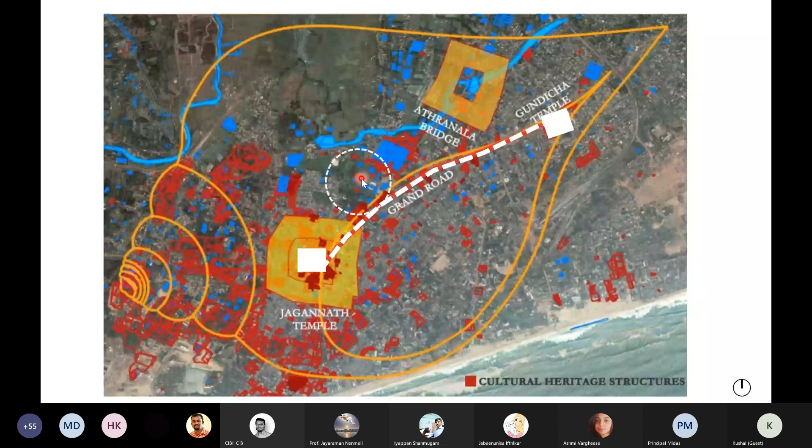But to develop this, we had to go through several sacred scriptures, how these have been described, and we tried to give references from the Skanda Purana, which was written around the 8th century.

There are several chapters in the second phase of the Skanda Purana. I have 49 chapters on the Puri Odisha region. It talks about how the Jagannath cult started and how people started embracing Jagannath as the supreme lord and king, and how the surrounding region got associated with the cult of Jagannath.

Along with the Skanda Purana, we also followed the Gita Govindam by Jayadev. He was a great poet of Sanskrit, and he wrote this epic poem, Gita Govinda, on the life of Krishna and Radha in the 12th century AD.

Jayadev was himself from Puri, so he completely described in his poem what trees have been planted, how people are sitting, how people are enjoying the landscape. So we had to take both of these into our study, and then we came to a conclusion.

This was brought to us by the king of Puri and everything. So we have a cultural advisory committee who advised us on these things.

If you are aware of how the Jagannath temple evolved in the Shankha Kshetra, it was on the Neel Parvat, which is a blue mountain, on which there is a banyan tree, or the Akshay Vat, called here a life-giving tree, and under that tree was a blue rock. That was the whole concept of the development of the Shankha Kshetra of Puri.

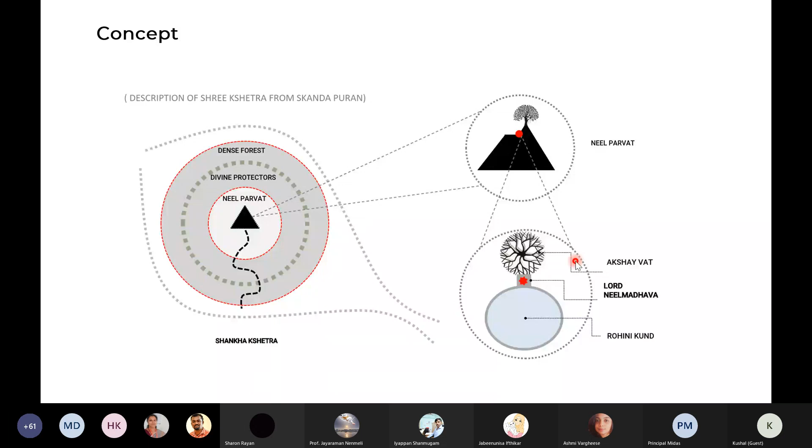And in the Gita Govinda by Jayadev you have water bodies, people moving in boats, creepers coming in, and people dancing around, enjoying time in the pleasure garden. This is a famous art form here in Odisha called the Pattachitras.

We also took inspiration from the Vrikshayurveda written by Surapala in the 10th century. Here he describes the pleasure garden. So I'll give you some time to read what a pleasure garden described by Surapala is. You can go through it, and I'll also read aloud.

Garden houses should be protected from the sun by thick foliage of Atimukta creepers. You have creepers over garden houses with honeybees hovering around them and flowers strewn over. Whenever the breeze comes from the sea, the trees sway with flowers, and you have a feeling of pleasure in that.

At places, beautiful ponds adorned with swans are to be made, with trees planted on the borders of these ponds, so that when the flowers fall, they fall on the waters and float on the water body, like eyes in the form of flowers.

Then there are long water bodies, free from aquatic life, where you have the pleasure of boating, with flowering trees all around and lotus sprouting somewhere, including blue lotuses that look like maidens' black pupils.

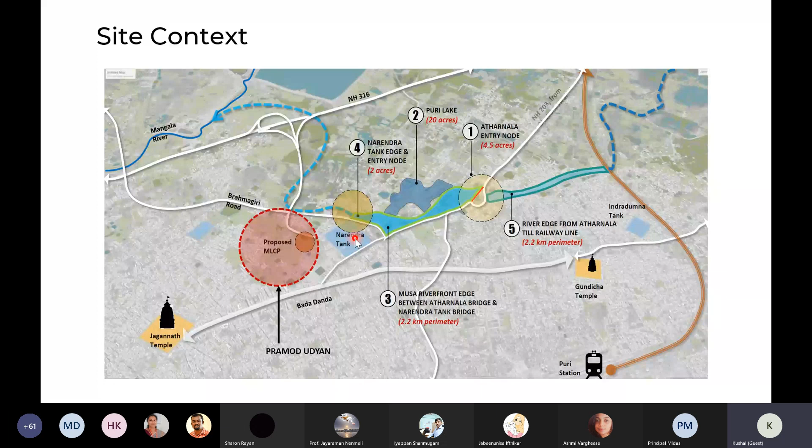So what we decided to do was, at location B there is an important mutt. Mutts are a sacred stay of saints who live here and have given their life to the Jagannath temple. They have made a whole sanctuary out of it with their own importance tied to the temple. This mutt is closely related to the land, and we wanted to create a connection between the tank, this Pokhari, the Narendra tank, and the site.

This is the entrance, the only entrance point to our pleasure garden. D is the Bento Pokhari, the hunting ground and hunting tank. And C is a small temple of Sugriva, where you have martial art forms being practiced.

So all these somehow relate to us as sacred. You have yearly functions of Jagannath happening over here, in these areas.

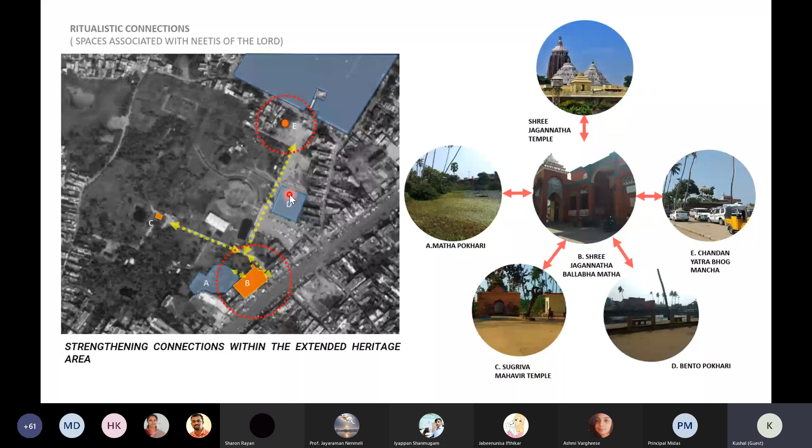So what we developed and proposed was the yellow part is the proposed pilgrim center, which is the MLCP, and the green area is the whole Neelachal Parvat, the mountain which we want to create here.

This is to be demolished because it has no historic significance and it's completely out of context. So you have several water bodies in the site which we have kept and want to develop, and conserving of the temples, revival of the mathas, and the area has to be developed through enclosed buildings.

We want to develop the grand entrance to these, and then you have a vehicular access to the pilgrim center from behind as well as from the front, and then you have a connection with the Narendra tank.

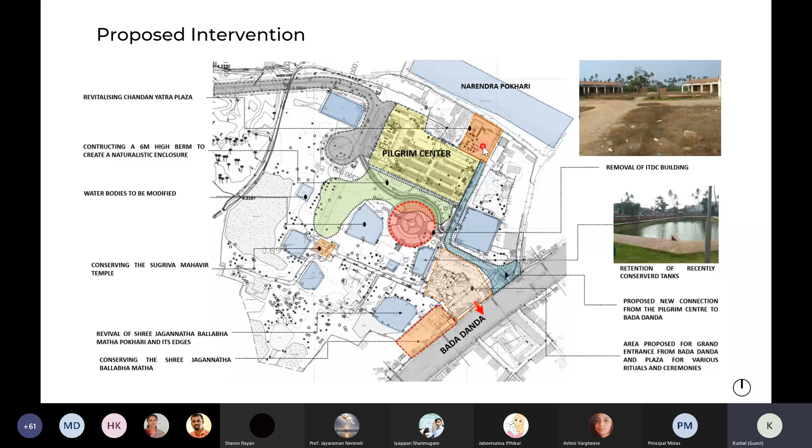So this is the grand road. This is 25 meters wide. This is the matha which I was talking about.

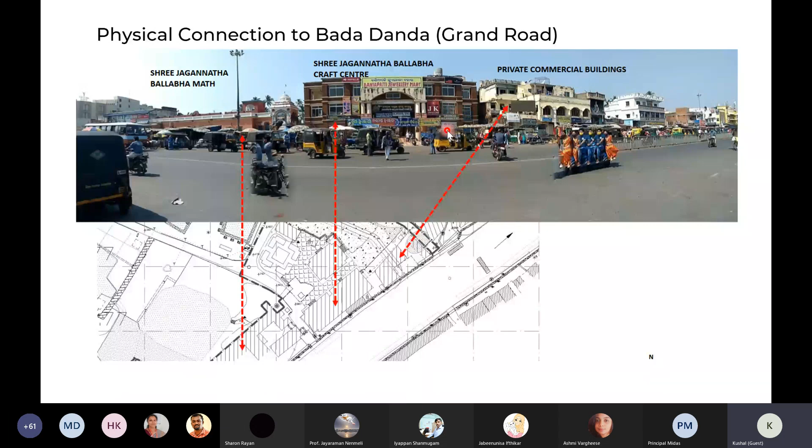And these two buildings have little significance in the region, so we want to take these over and give a grand entrance to our park, which has been designed by a famous sculptor who is no longer with us due to COVID, and he's a Padma Vibhushan. He designed this gate, so we want to preserve this as well.

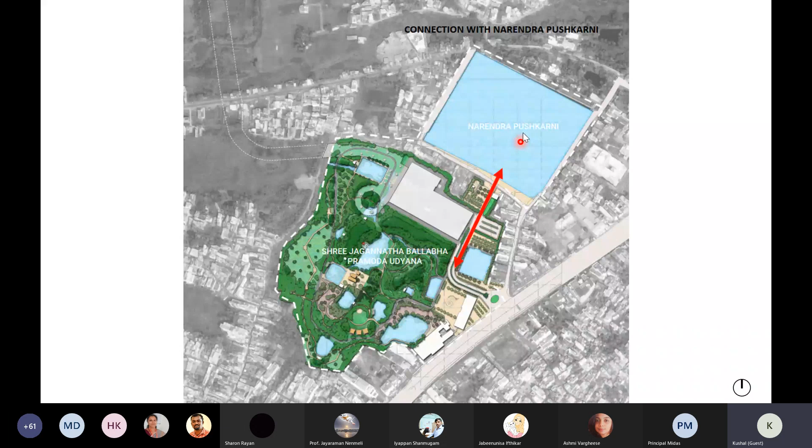And this was our proposal - a new approach connecting the Narendra Pushkarni with our Grand Road, and you have vehicular access on this road only. And this is the grand entrance which we are talking about as an amenity center.

We have cloakrooms, toilet facilities, restrooms for people. After they have walked 400 meters from the temple and approached here, they can sit here and relax, and then go into this nice landscape area.

So we did a hydrological study to understand how the flow of water takes place, because this, if you remember the site, is all marshland. So all the water has a tendency to flow from the south towards the northwest.

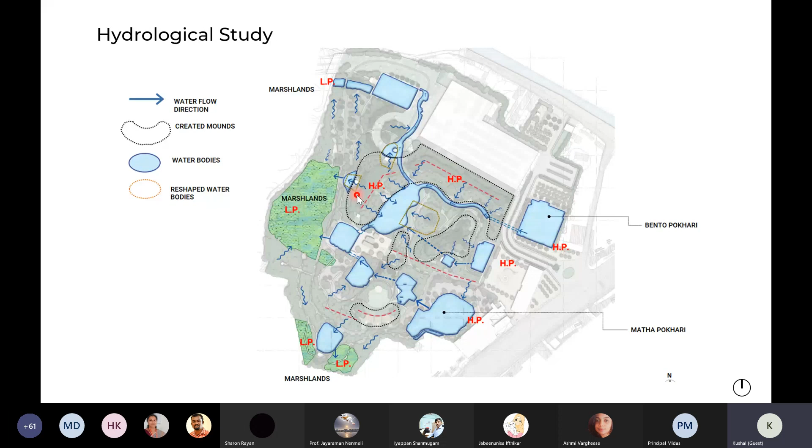So we have tried to develop water rivulets and channels, and these form the high points. We would like to dig these up, and the same soil can be used to make the mounds here, and then develop the landscape all around, which I will talk about again.

So we have zoned it. This is the place for the Chandan Yatra associated with the tank. Then you have the MLCP, the Bento Pokhari zone, the entrance zone, and then you have fragrant flowers.

Here people can walk around. This is the Jagannath Ballabha Matha. And then we have proposed a Natyashala, which is an open air auditorium kind of place for people to congregate. And then you have very local species planted here.

You have the Sugriva Mahavir Mandir preserved, the Nilagiri Kanan, the mountain we were talking about, with the replica of the Jagannath temple being recreated here in a very open form. And then we have some medicinal zones, and the peripheral planting, the forestry.

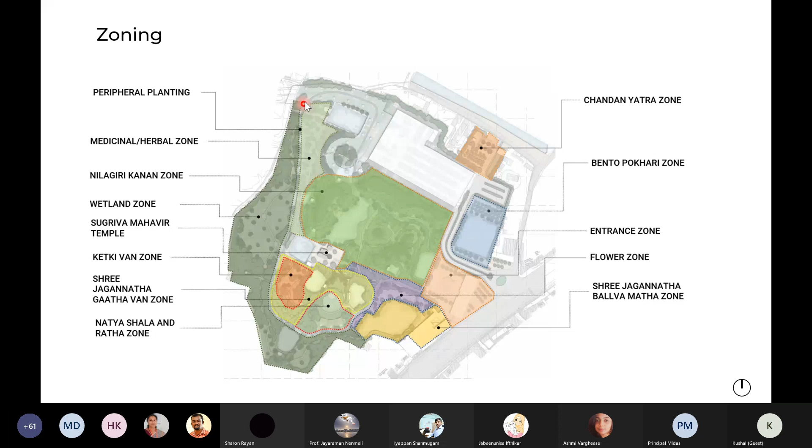So what we intend to do, since this is a 42-acre site, is develop an outer peripheral golf cart path for access, and inside will be all tertiary paths for people to leisurely walk around.

When we see this, I also wanted to point out how the shapes of the pathways are in the Indian traditions. We don't have straight paths or paths cutting at right angles. What we have are meandering pathways, meandering water bodies, and then the pathway ends into a water body.

You go across through a bridge. You have waterfalls. So nothing is sharp - everything is organic, developed by nature, so that it looks like nature has grown over it.

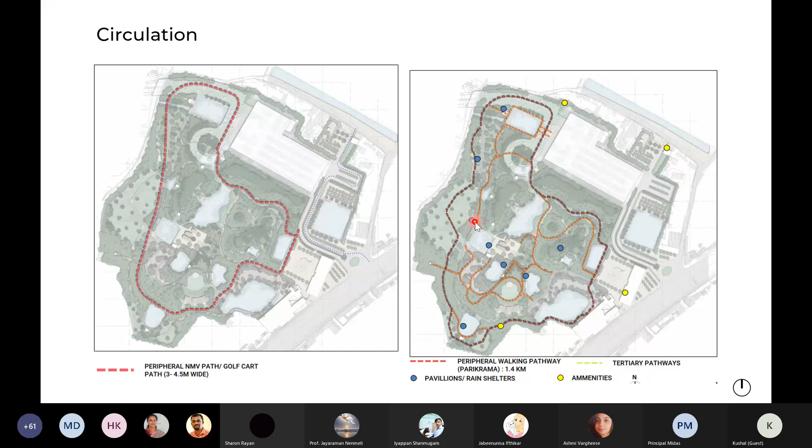So this is our site plan. If you see, you have the entrance and a nice water body to welcome you, and then you move around. This area has thick foliage.

You have to hide this new construction happening over here, the MLCP. And then this area is a high mound on which the replica of Jagannath will be there.

And then you have the Natyashala, where the annual chariots will be placed for people who could not come during that particular phase of Rath Yatra - they can come and visit here all along, and this will form the backdrop of the

open air auditorium. And then you have these water bodies - they have been reshaped, and they are no more rectangular or square or very rigid. They are very organic and free flowing.

And here you have the marshland on which we wanted to make some decks, so people can walk around and view the Jagannath temple towards the south. So these form the places from where you can see the temple as well.

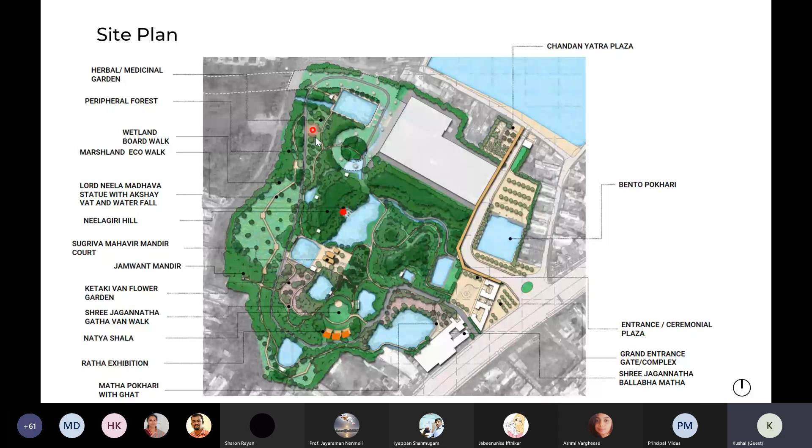And then what we were talking about, how the deities have to be placed as it is placed inside the temple - the 8 forms of Shiva, the 8 forms of Shakti. Inside the Jagannath temple you have Jagannath and his brother and sister, the Navagraha, Mahalakshmi, and the local deity as well. These are also placed inside the park, but not very symmetrically as in this temple, in a more leisurely form at different places. The devis will have a canopy in a Kalingan style of architecture, while the forms of Shiva will be in the open.

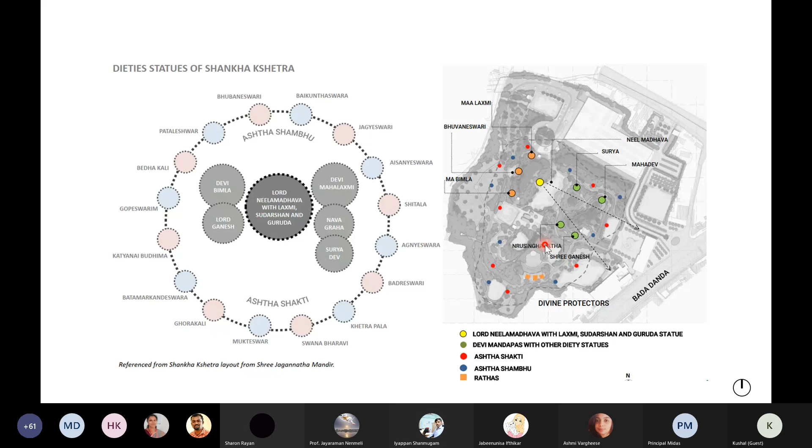So a few sections of the site - in the background of section 2, you see the MLCP being constructed, and in the last section you see the mountain on which the Jagannath statue will be there. On the far left corner you see the Ratha being placed. This is not stepped, but a very gentle slope, so people can sit around or lie down as per their wish on these lawns and observe some function happening here.

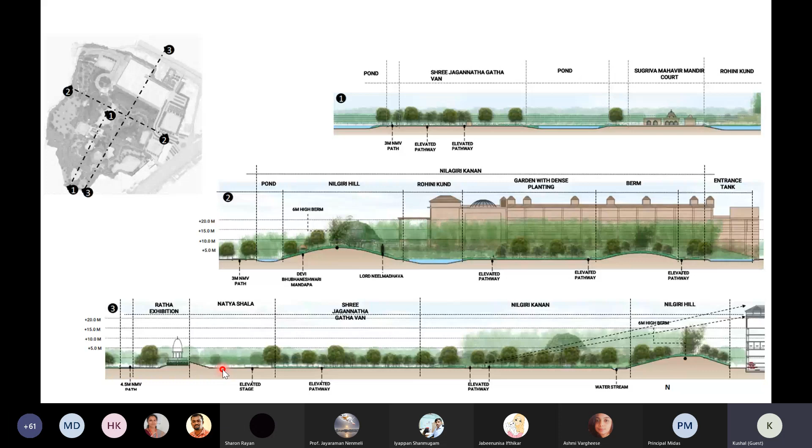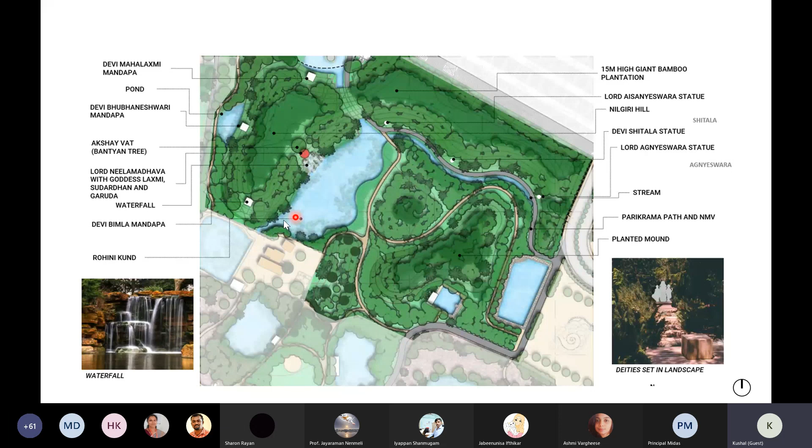A little zoom in on these areas - how the parikrama paths, the planted mounds, and different statues of the lords are placed. You have waterfalls, and these are a few other images you can see at the backdrop. The MLCP is hidden over by the tall bamboo and palm trees.

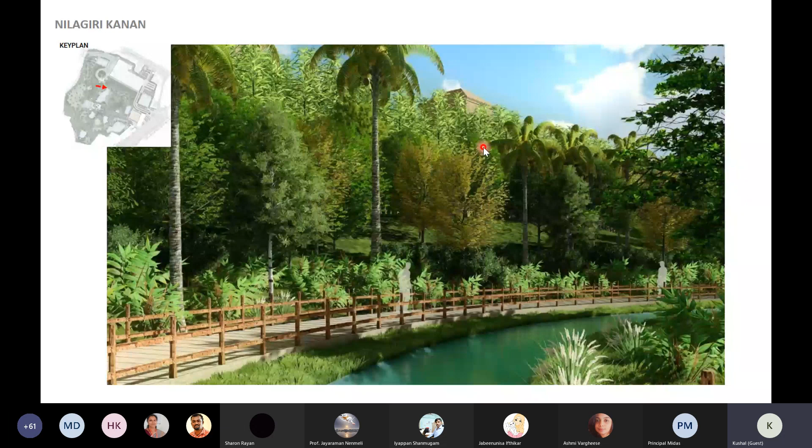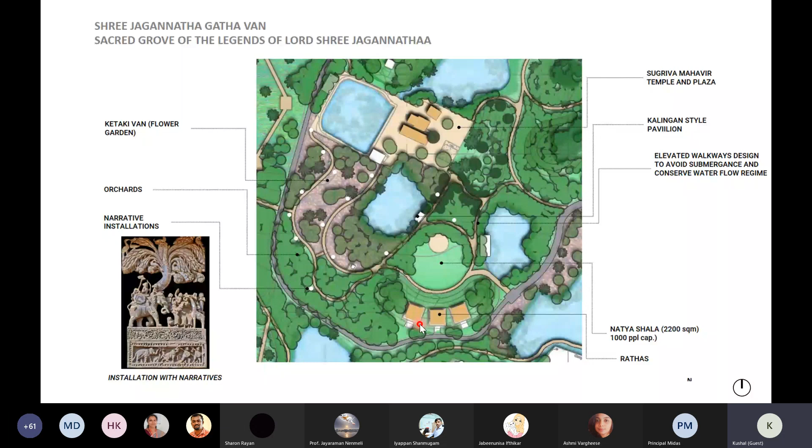So this is one of those, and the image I referred to is something similar to a Raja Ravi Varma painting. We want to make a replica of flowering trees giving shade over these water bodies, with swans, water lilies, and lotuses blooming here and there.

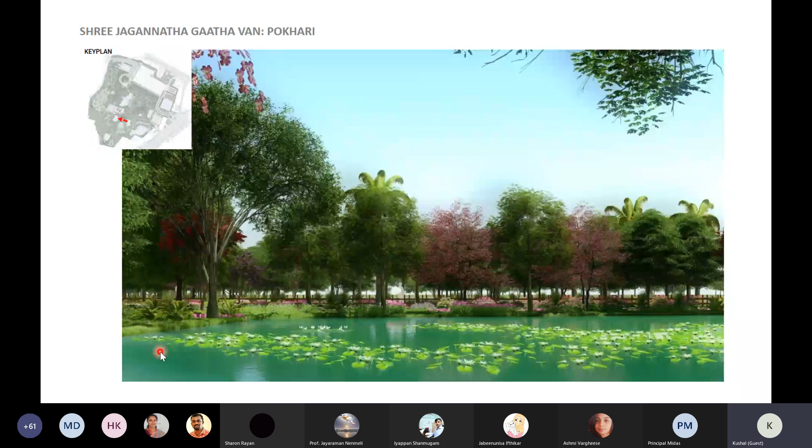Then you have the medicinal herbal garden, because as per stories, Jagannath falls ill for 21 days, and various Ayurvedic oils are extracted, and then the Lord wakes up from his 21 days of sickness. So all those kinds of plants can be planted in these areas, and people can go and have a look, or maybe sometimes even get a bottle of it.

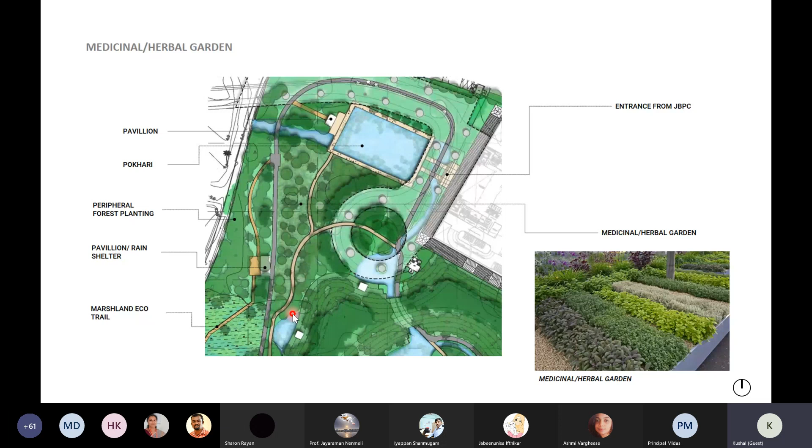Talking about the materials, we wanted to use only the locally available ones - the indigenous khondalite stones and the laterite stones, which are in abundance here and can be sourced from like a 10-20 kilometer region.